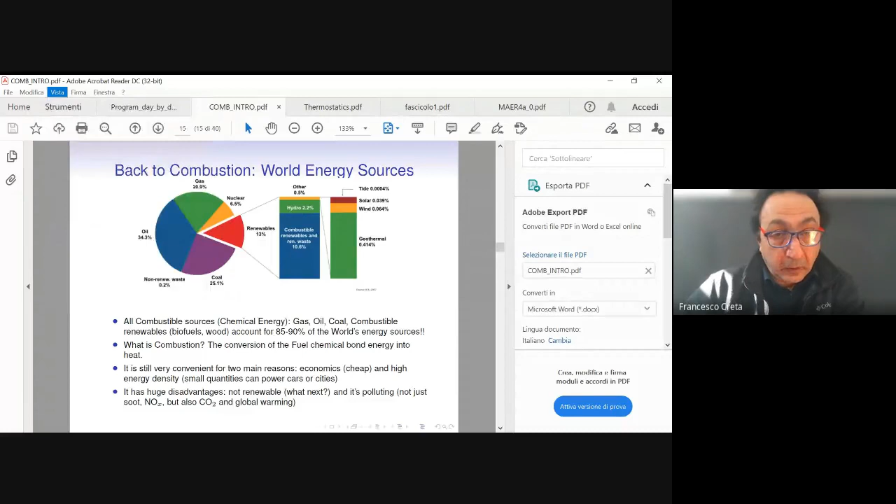There. Can you see? Sí. Okay. Yes, okay.

Perfect. Okay. This again, it's not fully part of the course, so it's just an introduction. Okay, so you don't have to take notes or anything. I'm going to give you these slides anyway. And then when we're through with these slides, I have some introductory slides for the thermodynamics part. Again, the first part is still an introduction. So it's about 3 or 4 full classes of introduction, let's say, which you have to follow, of course, but it's not part of the examination or anything.

Anyway, we were looking at this slide the other day, which really gives you an idea of how crucially important combustion is. If you look at the numbers, combustible sources account for at least 85% of the world's energy sources. The rest can be thought of as nuclear or renewables, but in these renewables, you also have combustible sources, such as biomasses and things like that. And it's clearly still widely used essentially for its cost. It is very cheap to burn things as opposed to do any other thing, okay?

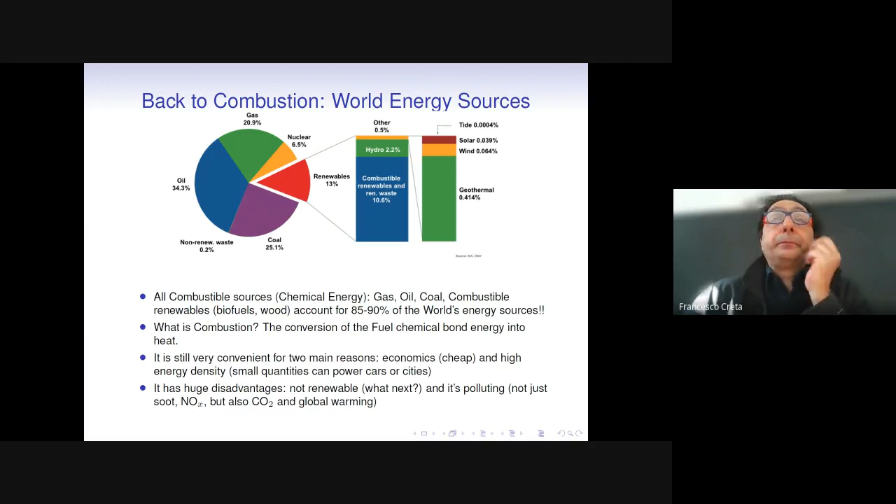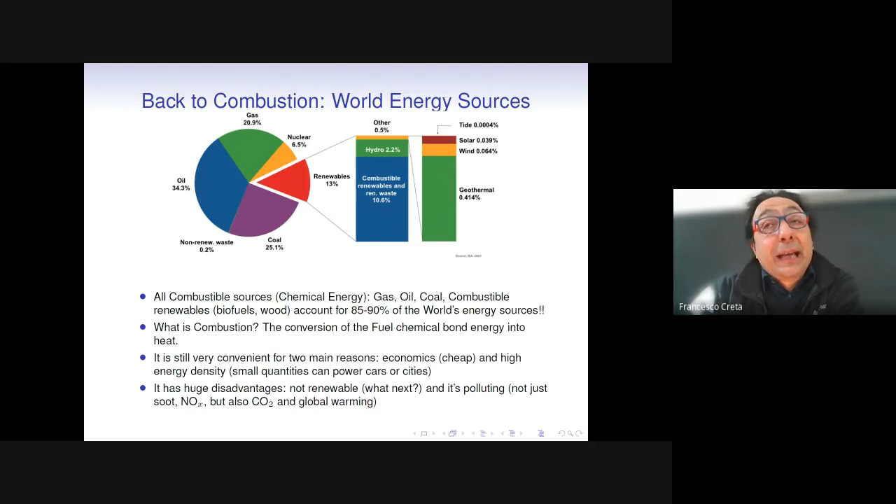Okay, this is one thing. The other thing: hydrogen has its own problems in terms of production. You can produce it through the electrolysis of water. You can carry it through other molecules like ammonia. Ammonia, NH3, has 3 hydrogen atoms attached to nitrogen. It's an ideal hydrogen carrier. It's also a fuel to some extent, though it's a pretty bad fuel. But if you don't use hydrogen, then you really have to know combustion physics in order to understand and mitigate the production of pollutants.

Well, this is another slide here about tomorrow's challenges. You're all familiar with this clearly, and you can see how exponential the growth of the energy demand is, really huge. So how do you reduce pollution? How do you reduce the emission of greenhouse gases? Well, you first and foremost need to study combustion.

And so combustion for you engineers is not just the conversion of energy within a thermodynamic cycle. That's what you're used to. For example, an aeronautical engine runs on a Brayton-Joule cycle. So your only question is not that of converting chemical energy into heat in order to have useful work extracted by the thermodynamic cycle, but it's also the problem of reducing and mitigating pollution.

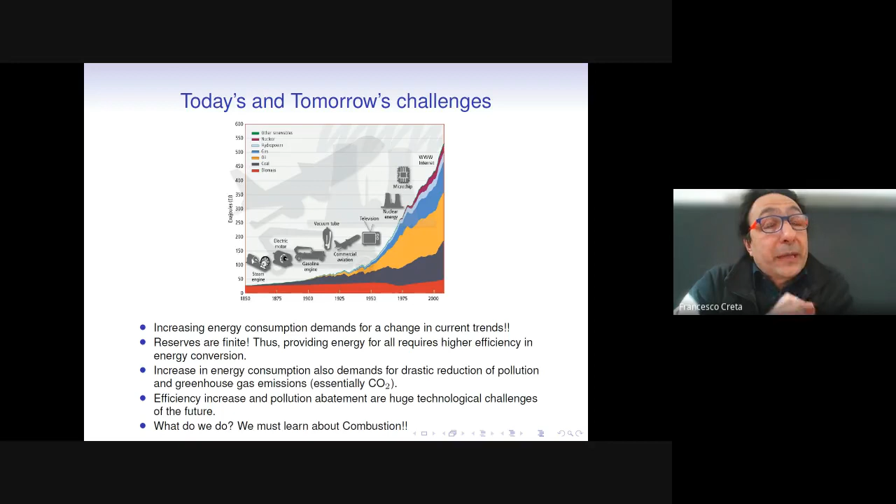clearly we're tending to maximize there the temperature, and by temperature we mean a very specific thing, which is called the adiabatic flame temperature, which is essentially the maximum possible temperature achievable in an isolated system. So a system that fully converts its chemical energy into heat without exchange of heat with the surroundings, in the stoichiometric proportions of oxidizer and fuel. Reason being, as you all know by now, the maximization of temperature will maximize the specific impulse of your propulsion system, okay?

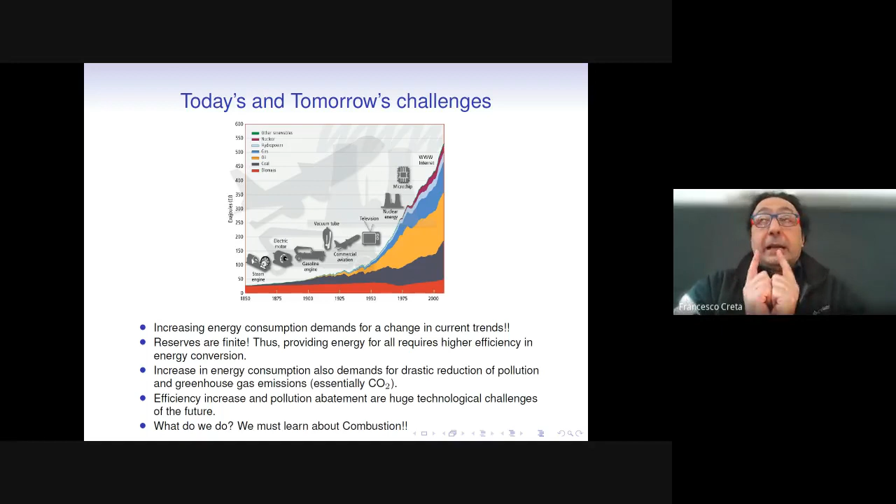And a great deal of this course will be dedicated to the calculation of both the equilibrium temperature and composition. So the adiabatic flame temperature and the equilibrium composition. So that is a very big, very important part of the course. And I'll tell you later. I don't want to tell you too much.

So what is pollution? Of course, it's an old problem, yes. We need to have new solutions, and we have, to some extent, a lot of new solutions. But let me just make a list of the main pollutants that we address as pollutants, okay? So we're talking about products of combustion. As we know, there is a reaction between a fuel and an oxidizer, and the products of this combustion will be molecules that are at a lower energy state than the fuel and oxidizer, so that essentially we can get heat out of the whole process.

This we've seen, but also you can't really choose your own product, okay? It's what you get. So one of the products, for example, is what we address as soot. Soot is this thing here, the black smoke coming out of the diesel engine. And it's really macroscopic particulates. So when you come across things like PM, particulate matter, PM10 or PM2.5, this addresses solid particles that are macroscopic aggregates of products of combustion, of the order of 1 micron or 10 microns in diameter.

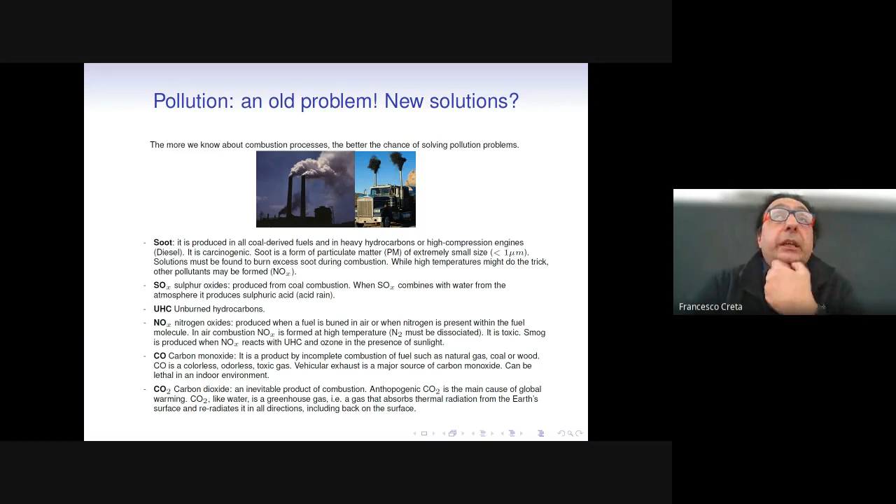Now, another pollutant is carbon monoxide. Carbon monoxide is quite poisonous. It's actually lethal. It is essentially colorless, odorless. You don't see it, you don't smell it, but you die from it. Now, CO is really intrinsic in the combustion of hydrocarbons because carbon monoxide is the very last molecule before carbon is fully oxidized to CO2. It's just missing one oxygen atom. So CO2 is not toxic, but CO is dramatically toxic.

Think about this. When we're burning things, if for some reason we're not completing the full oxidation of carbon into carbon dioxide, we're really producing a toxic gas. And this is what happens when you hear in the news of people dying from malfunctioning heating devices, especially during the night when you're asleep. You don't realize that your heating device is malfunctioning, burning inefficiently and not completely oxidizing the fuel into CO2. That's when the device starts to produce carbon monoxide.

So again, very, very toxic, especially in household environments. And then clearly CO2. CO2 is not considered per se a pollutant. It's a greenhouse gas, but again, it has to be considered as a crucial aspect of combustion, okay? In the sense of what I call here anthropogenic CO2, meaning man-made CO2, because that, as we saw the other day, completely displaces the carbon cycle and essentially extracts carbon atoms from reservoirs back into the atmosphere, where it shouldn't be there. And it cannot be processed naturally and put back into Earth.

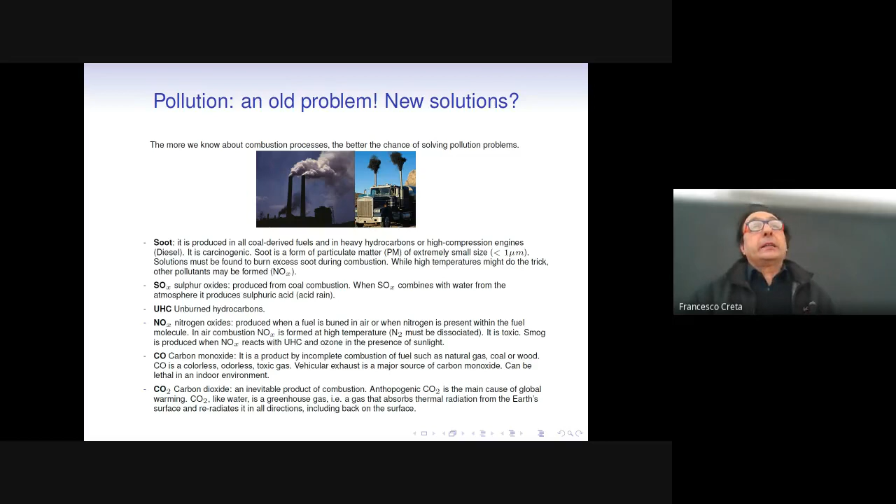Some people calculated how many trees we would need to process the CO2, okay, and fix it in an organic solid matrix like wood. And it's a ridiculous number, okay? Hundreds of trillions of trees, something like this. So it is not a viable technique, that of planting trees. It would be essentially a solution, but not one that is practical, really. So what we really need to do is reduce the input of carbon atoms in the atmosphere.

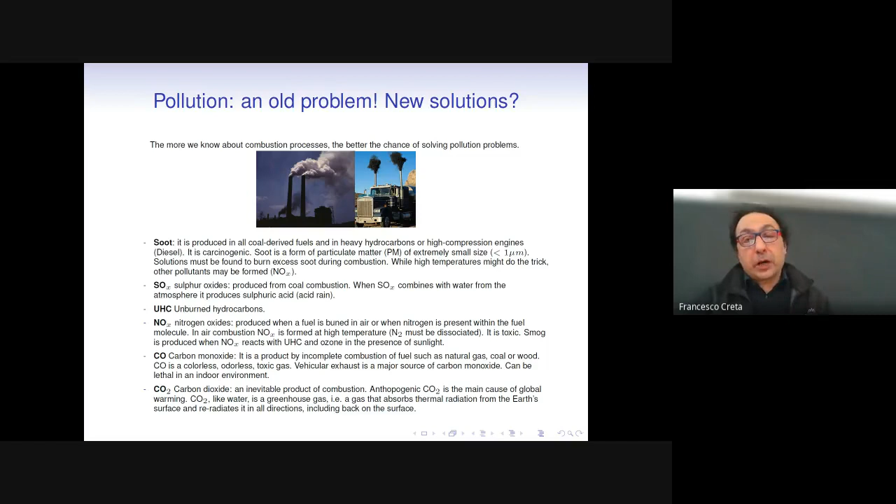Now, let's start playing some videos. You have to tell me whether you see them or not, because probably you can't if I don't share. Can you see this, or do you still see the slide?

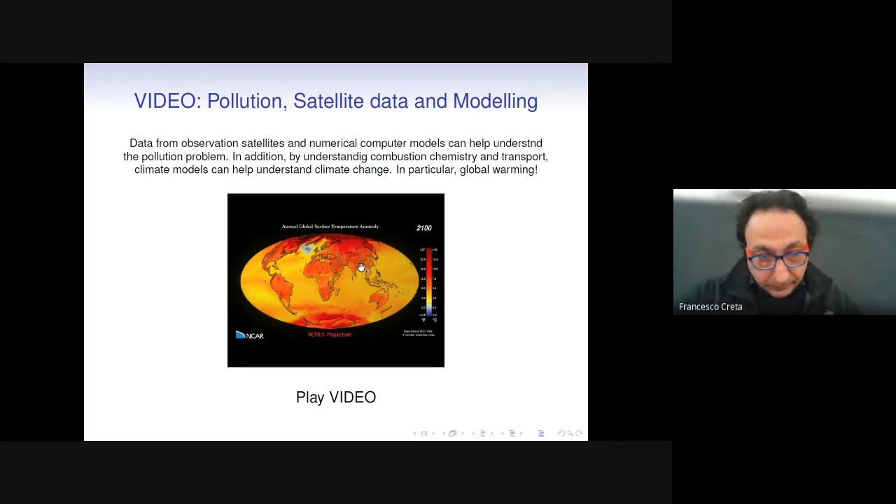I have to share the whole screen. Okay.

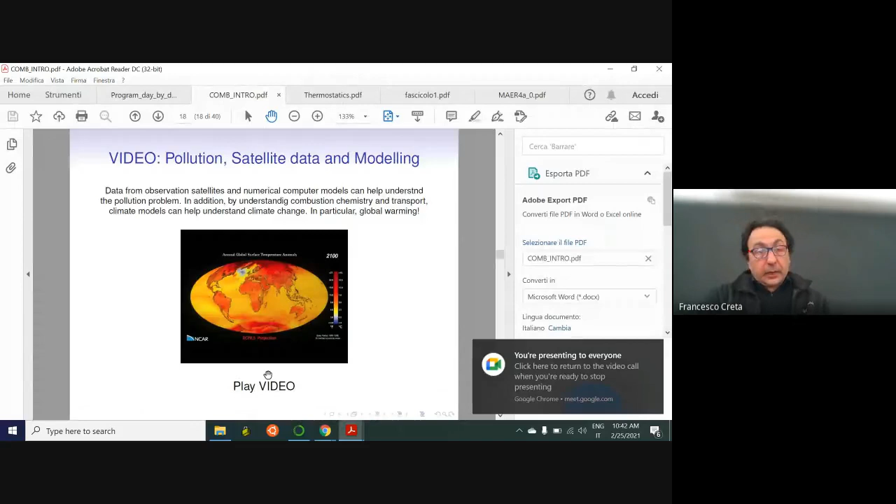Okay, well, what I'm going to show you here is essentially computer models that try to model climate, okay? In order to understand the impact of pollution. So what you can do is have a sophisticated model of the Earth's atmosphere where you're modeling, among other things, the radiation from the sun and the effect of a certain concentration of greenhouse gases within the atmosphere. What happens is that through the greenhouse effect, the radiation is being absorbed and then re-emitted at a certain frequency, okay, by the CO2 molecule. Therefore, the end effect is that of trapping heat.

Now, there are many models of this kind, maybe 20 around. They're very, very complex computer models that have been developed over a number of years, okay? But the tragic aspect of this is that they all agree. They all agree on the fact that the average temperature is increasing due to the excess CO2 in the atmosphere. So let's see.

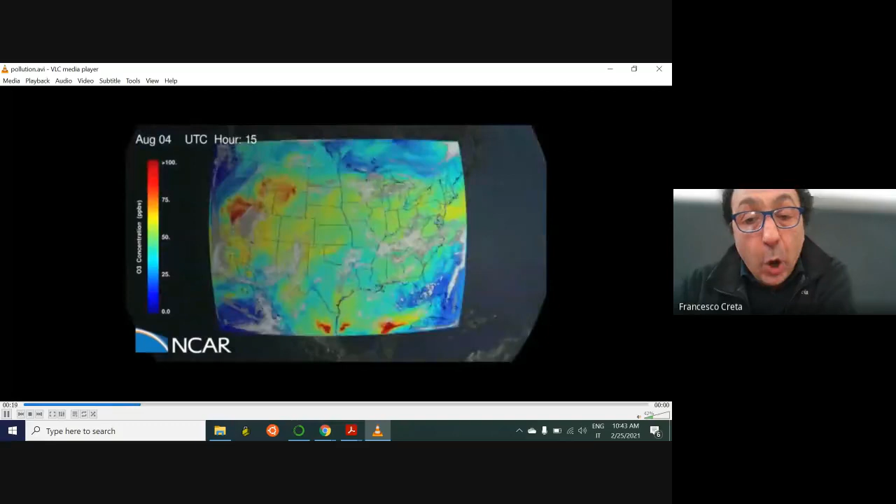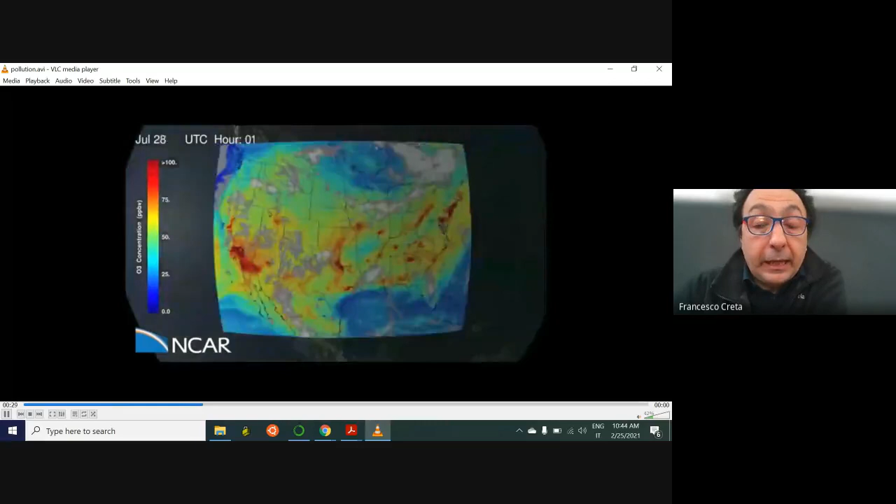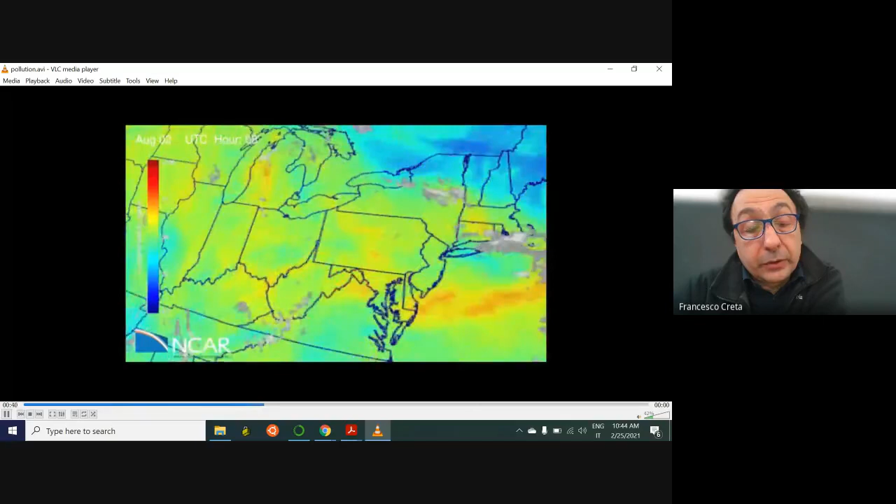So this is the National Center for Atmospheric Research. This is a blend of both computer models and data from satellites. This is a visualization of actual pollution. So this is reality. And it's the ozone that is being produced at sea level by things like cars and urban centers and factories. So you can actually see, going from day to night, okay, the pulsating input of ozone molecules that are quite visible in the United States. And you can see the dramatic concentration, especially in the populated areas.

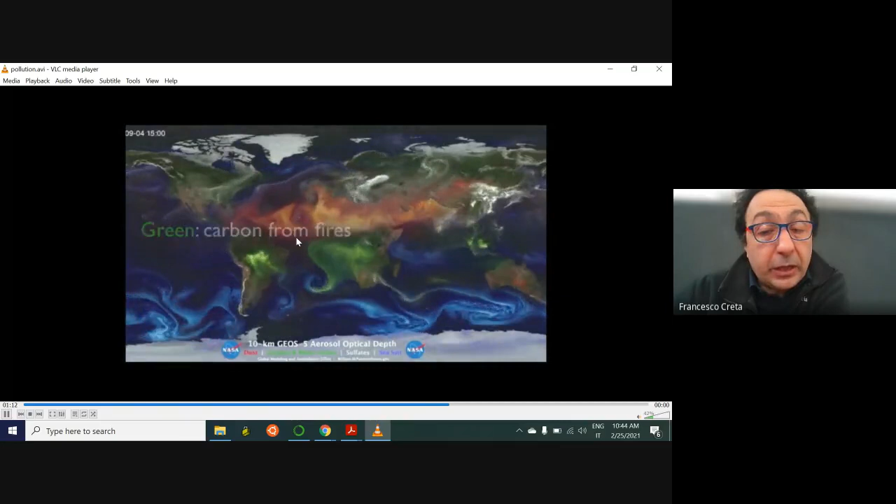This is another computer model of the Earth's atmosphere. And essentially, what you have to look for here is the white stuff. The green is carbon from fires, okay? The white is sulfates from fossil fuels and volcanoes. So essentially, you see that burning things has an effect on a global level. In China here, in Europe a lot, and in the US, you can see the input of sulfates that is man-made.

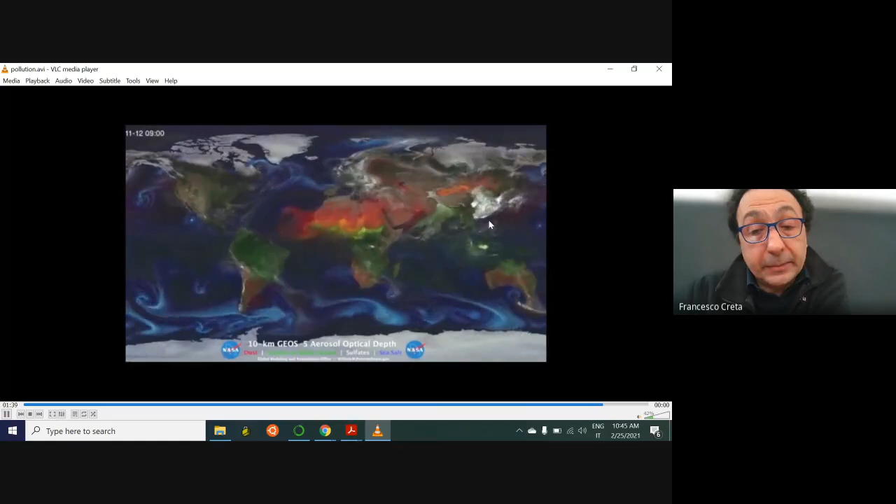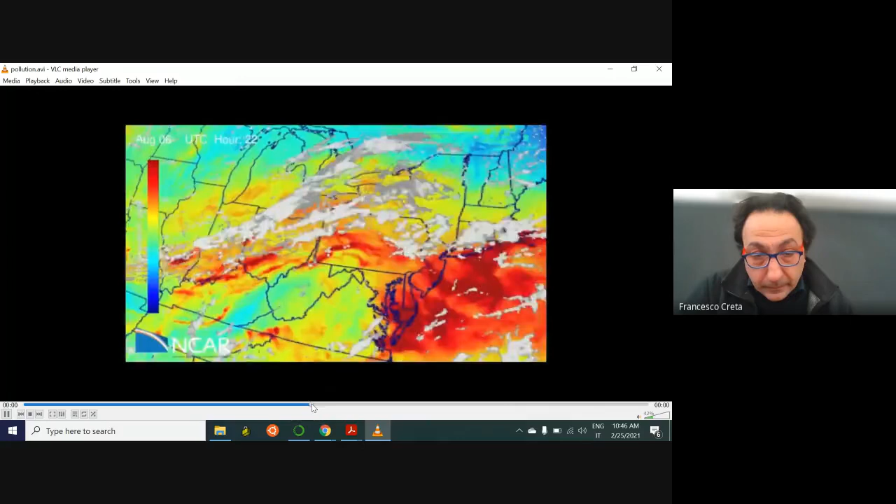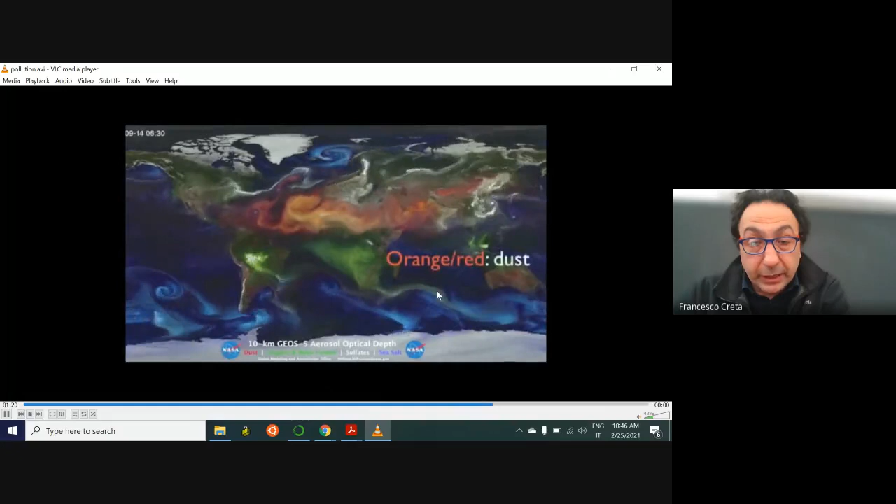You should concentrate also on Madagascar here, because there is going to be a volcano eruption. Well, not anymore. I don't know what's going on here. There's going to be a volcano eruption, and you can see, let's say, the natural input of sulfates, which is, I don't know, maybe I missed it. Sorry, blue is the sea salt. Well, anyway, if it's not here, then I may have dreamed it, but I remember that there was an eruption, and the input of sulfates was of the same order of magnitude.

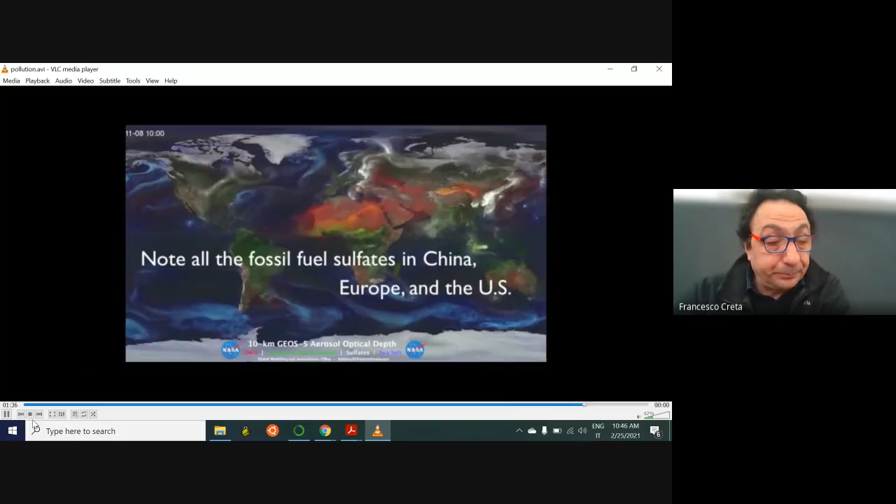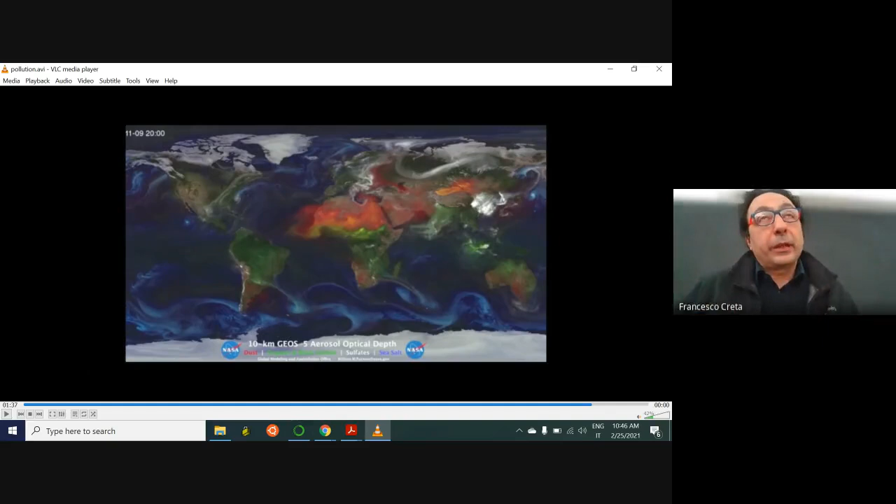Well, there's some skipping thing. Anyway, it doesn't matter. I'll show you maybe another time. But of the same order of magnitude as the daily input. So it's like having a number of volcanoes, okay, continuously erupting. That's the amount of pollution that we're actually putting into the atmosphere.

Now, we'll try to jump from one topic to another here, just to give you an outline of what combustion research is. It's a huge field, okay? So I'm going to give you just a few snapshots, okay, of what's going on. This is one thing that has been going on for the past maybe 30 years or so, which is trying to come up with more efficient ideas in internal combustion engines, okay?

I know that lately there's a lot of talk about electrical engines, or electrical power engines, but don't forget that electricity stored in batteries ultimately comes from power plants, which are very likely to run on hydrocarbon fuels. So at the end of the day, when you take two cars, one running with an internal combustion engine and another one running on batteries, at the end of the life cycle of the car, the pollution produced by both cars is comparable.

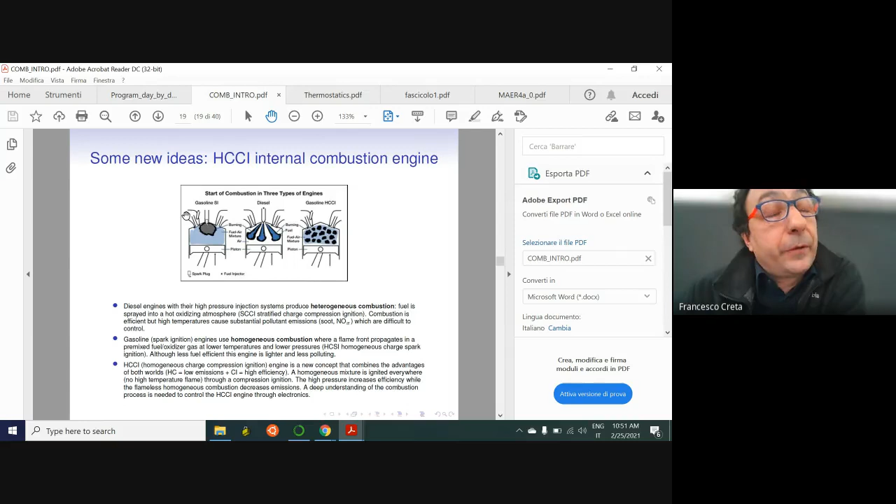It works through so-called premixed combustion or premixed flames. So in fact, what happens is that before entering the cylinder, the fuel is already mixed with the oxidizer. That's why it's called premixed combustion. So what you have here is a nice homogeneous mixture that is flammable. And the way in which these mixtures burn is through the propagation of a flame.

Now, you can choose your so-called equivalence ratio, so the mutual amount of fuel and oxidizer. It can be stoichiometric, it can be lean, or it can be rich, so in excess of oxygen or excess of fuel. So for example, in this case, you can totally avoid the production of soot because soot only forms in very rich environments. In diesel, because it's diffusive combustion and you're injecting the fuel directly, you have zones where the composition is rich.

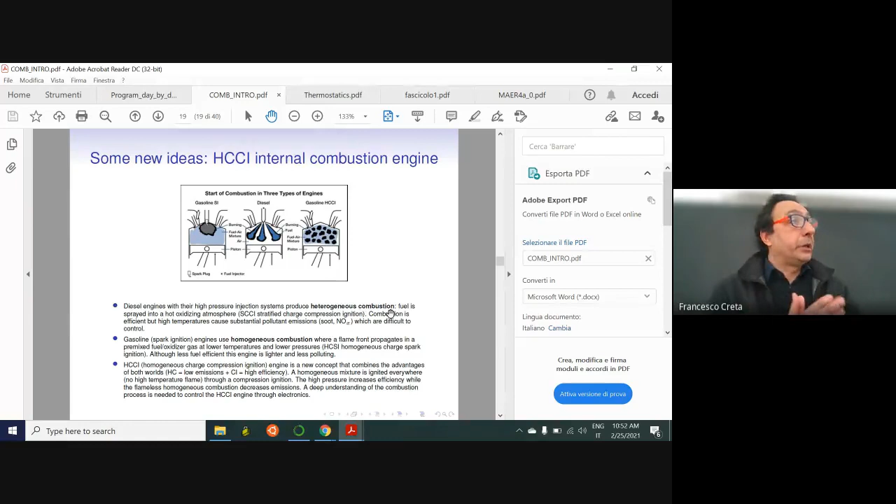Now, we know that these two have advantages and disadvantages. So diesel engines operate at very high pressure, and they have injection systems, and they work on non-premixed combustion, or as it's called, heterogeneous, as opposed to homogeneous combustion. Heterogeneous because you have essentially liquid droplets of fuel, and then you have a gaseous oxidizing environment. So fuel is sprayed into the environment.

So we call this an SCCI engine, a stratified charge compression ignition. What does that mean? It means, first of all, the charge of fuel is stratified. Essentially you have different compositions because you have a jet. You don't have a homogeneous fixed composition. You have a stratified charge. It changes from point to point, unfortunately.

But you have compression ignition, which, because of the high pressure, is thermodynamically quite efficient. So combustion is efficient, and the thermodynamic cycle is efficient. That's why diesel engines were popular. But the stratified charge is a source of pollution. So it has good and bad in itself.

Now, gasoline engines or spark ignition (SI) engines use premixed combustion, which we can call homogeneous combustion. So it's just one phase, a homogeneous gaseous mixture of fuel and oxidizer.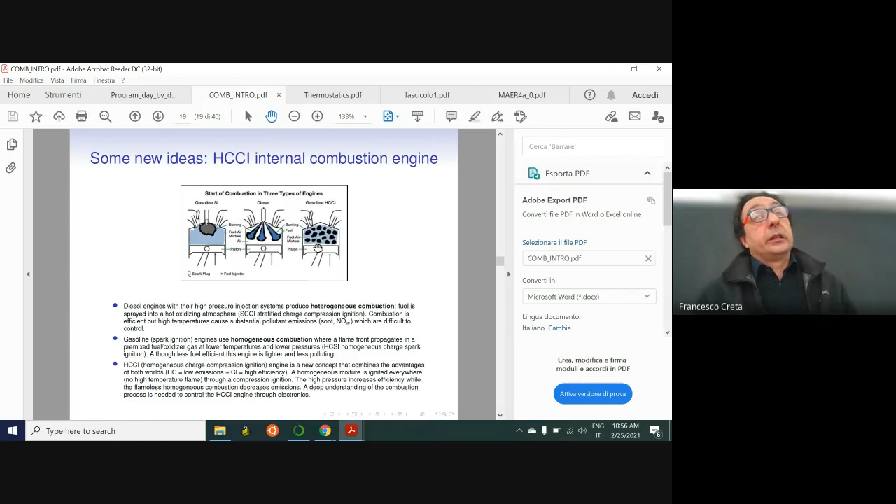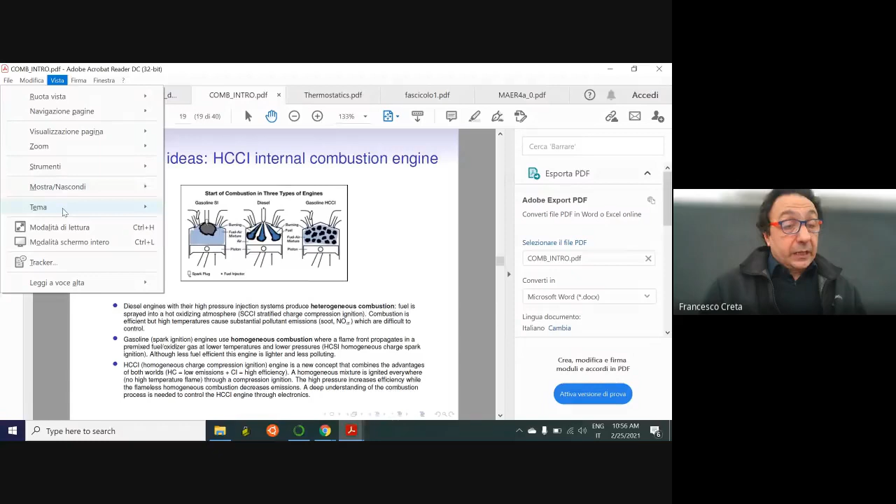Homogeneous ignitions. So the high pressure now increases the efficiency of the cycle, and this so-called flameless combustion, homogeneous combustion, decreases the emission. So it would be a nice idea, but the thing is, it is extremely difficult to reach and support in a stable manner this sort of regime of combustion. Okay, so to this day, no HCCI engine has ever been industrially produced, unfortunately. But again, that's why we need to study combustion. Okay.

This is another application of combustion research, okay? And it's computer modeling of combustion. Now, this is something that myself, I am involved in for many years. Now, in order to design combustion devices, computational fluid dynamics and computational models are used in an increasing manner, okay? Of course, to carry out simulations, you really need to master the theory of combustion. Why? Well, because essentially this reason.

Combustion, whether it's non-premixed or premixed, invariably occurs in a turbulent environment. You can see here, okay, especially with Reynolds numbers associated to both internal combustion engines, or this is a helicopter combustor, an aeronautical combustor. The physical dimensions are such that the Reynolds numbers are extremely large. When the Reynolds numbers are large, the viscous forces are extremely low with respect to the inertial forces, and you have a turbulent regime where a series of cascading smaller and smaller size eddies are formed, and these will interact with flames. Okay, so that's the whole complexity of the process.

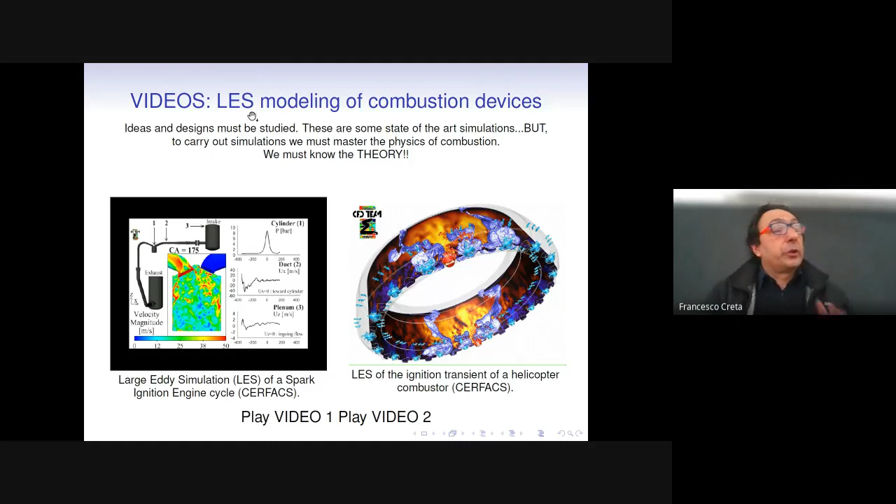So we need larger grid sizes, much larger than your characteristic length scales, much larger, unfortunately, than the thickness of the flame. And then we use models that are physics-based, that is, they take advantage of our knowledge of combustion physics to model whatever we are not seeing on the grid, okay? And this is called, for example, large eddy simulation, which is already complicated with non-reacting fluids, but now you have a reacting fluid, so it's much more complicated. Let me show you some examples here.

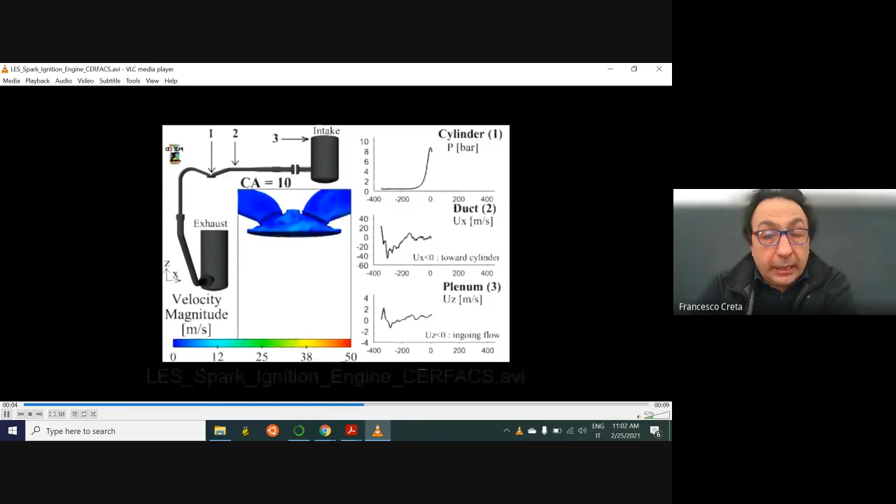So the first example is an internal combustion engine, okay? So again, you can't see the mesh here, but this is one example. The other example is the one on the right here. You'll see the ignition process of this combustion chamber.

So you see a number of injectors here. They're swirled injectors, okay? Very similar to also the ones you find in aircraft engines. And in fact, this could be, okay, it's very similar to an aircraft engine. So it's an annular, so you have the shaft in here, and then downstream here, you'll have the turbine, and you have the compressor ahead.

And you'll see that the yellow part is essentially the hot part. You'll see a flame propagating all the way around. Okay? I hope you can see. So you see here the injection, and then you'll see a premix flame forming, you see here, and then propagating all the way down the combustion chamber, you see?

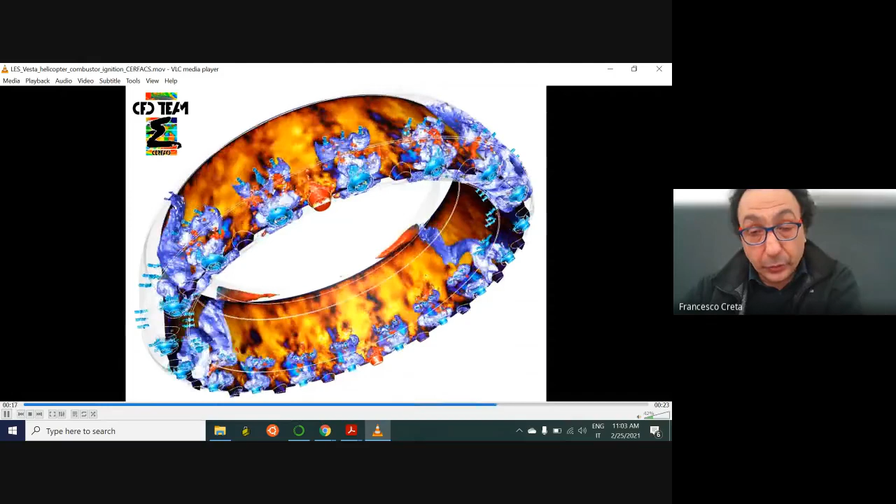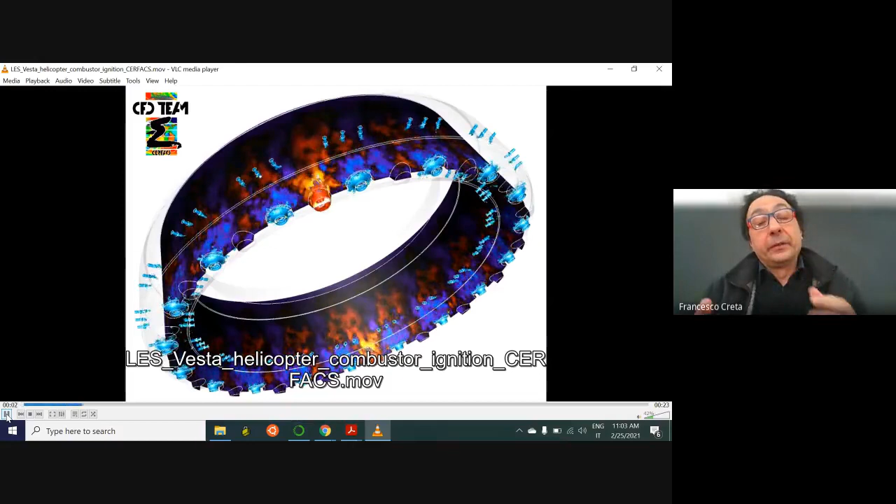Now, this is an LES. So again, there's a lot of modeling here, a lot of subgrid models, okay, that work in order to essentially tell us what is going on within a single cell, okay, which is far bigger than the Kolmogorov scale or the flame thickness.

In this particular case, for example, what they did is they thickened the flame artificially in order for you to resolve it. The problem is that you're changing the physics here, so you have to compensate for that, okay? So that's one technique that's being used.

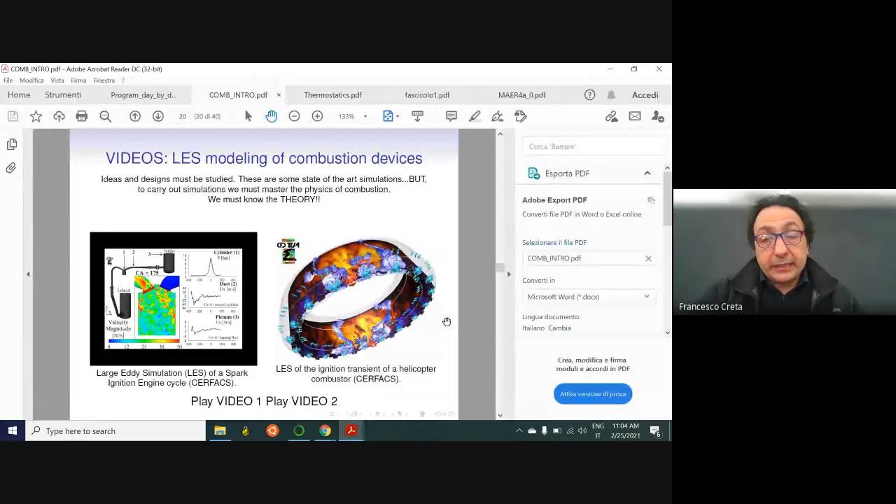Ramjets essentially are engines that don't have compressors and turbines, but they essentially work at high speed, and they compress the fluid just by the action of the ram effect. Okay, the ram effect is essentially a compression in the diffusion part or in the air intake. Clearly, it won't work when the aircraft is stationary, so it needs to be brought to a certain speed, supersonic speed.

But in a ramjet, the stream of air is compressed, but it's compressed and slowed to subsonic speeds through a series of shock waves, okay? So that you can burn your mixture, your fuel within this airstream that is subsonic, which is easier to do. Now, clearly at high flight speeds, the losses in terms of total pressure losses through the shock waves are huge.

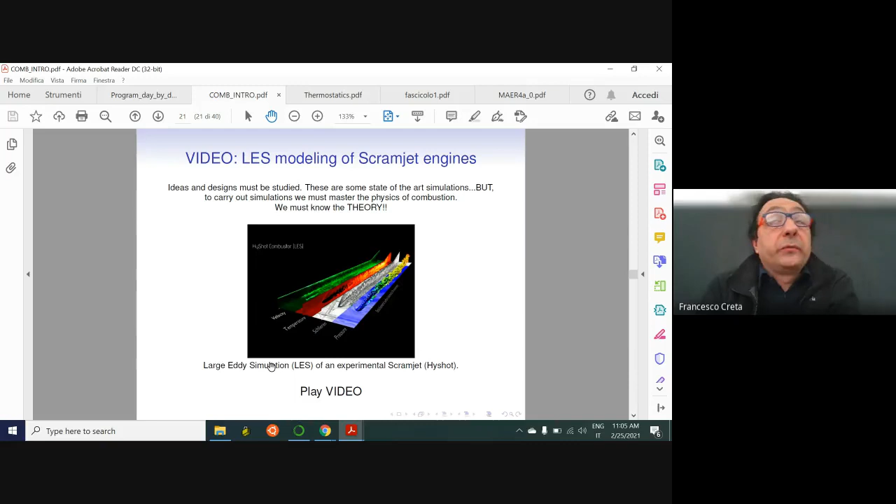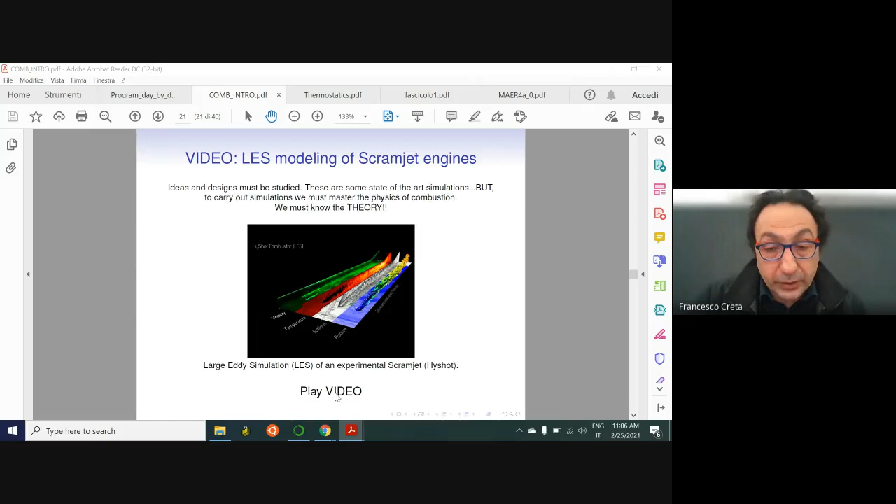So one way to avoid this and be able to access sort of much higher flight speeds is to carry out the combustion within the engine at supersonic speeds. So this is a supersonic combustion ramjet, or scramjet, okay? Now, this is a simulation of what's going on in an actual device that's called HyShot.

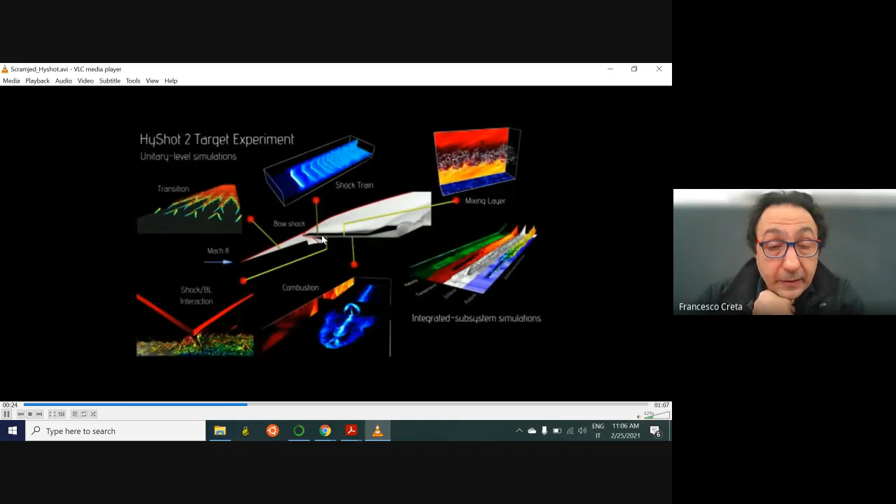It's just something that is sitting on top of a rocket that was experimented a few years ago, where essentially you'll fly this thing for a few seconds, and within this shell here, which will fly off, you have an air intake, okay? And within this part here, you see the shock here, the shock wave. Within this part here, you'll have combustion, okay?

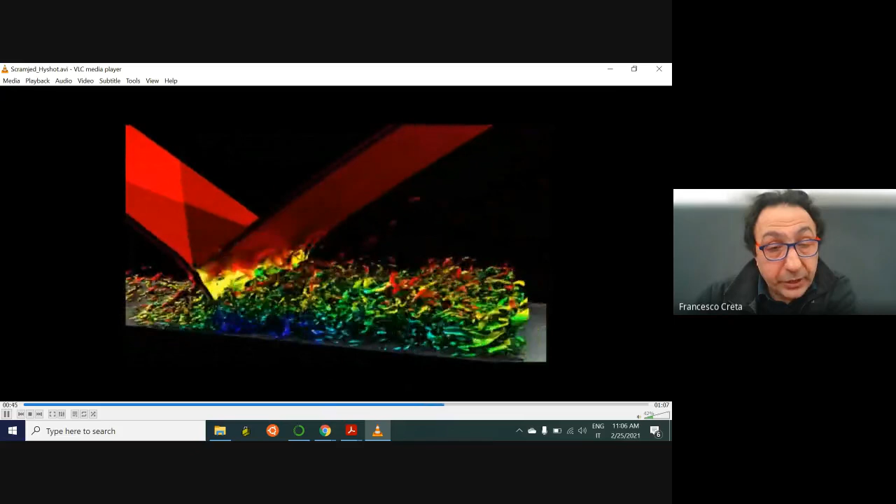So this is a simulation of a shock wave boundary layer interaction. So you have a turbulent boundary layer here and a shock wave that is stabilized. You see the sort of lambda shape reflection here, and you see how complex this situation is. We're still talking about large eddy simulations.

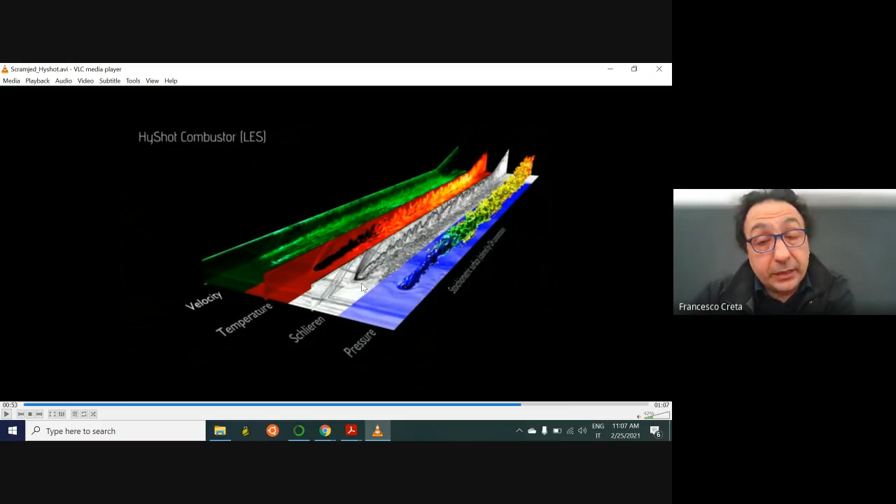What you see now here is the injection of fuel in this supersonic stream. So you see a sort of a side or a jet in crossflow, as it's called, being injected within the stream in the hope that clearly you can stabilize a flame of some sort and convert chemical energy into heat.

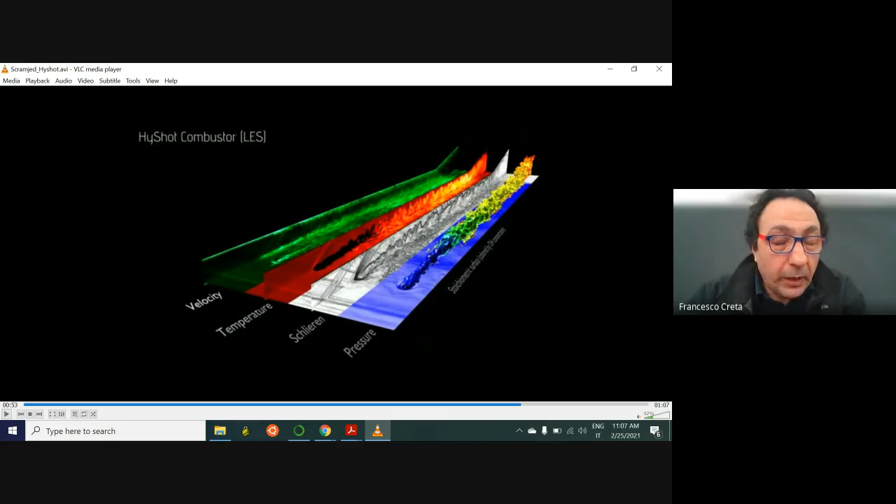Now, you see pressure here, the pressure field. You see the Schlieren field, which is essentially a measure of the gradient of the density, the temperature field, and the velocity field. Okay. Again, very, very complex simulation. It's also quite old at this point, the simulation, but you can only imagine how complex this is.

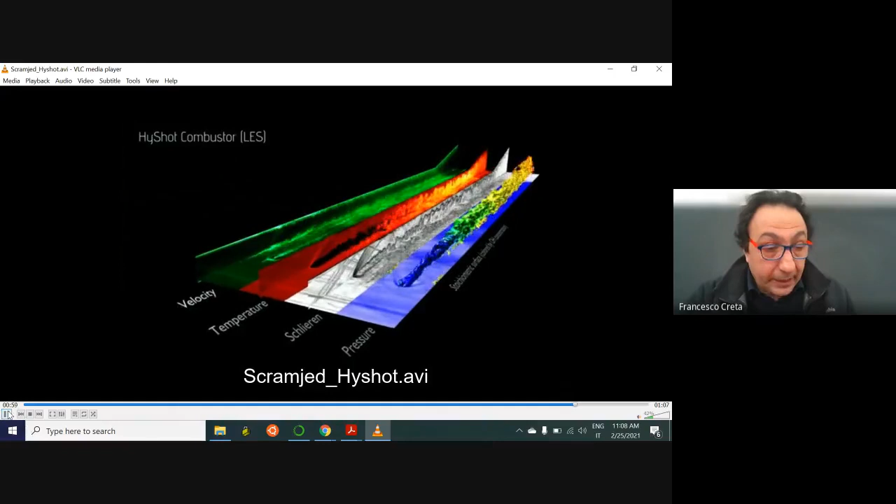And you can see, for example, the shock waves emanating from the, let me show you again, emanating from the jet in crossflow, okay?

Now, I'll be honest with you, some of you will be involved in some sort of numerical simulation at some point in your life. Before we can get to this, we need to know what we're talking about. We need to know the physics of combustion. So unfortunately, there's a few steps that we have to take back before we can do this, okay? This is the fun stuff, but we have to do some sort of boring stuff before this.

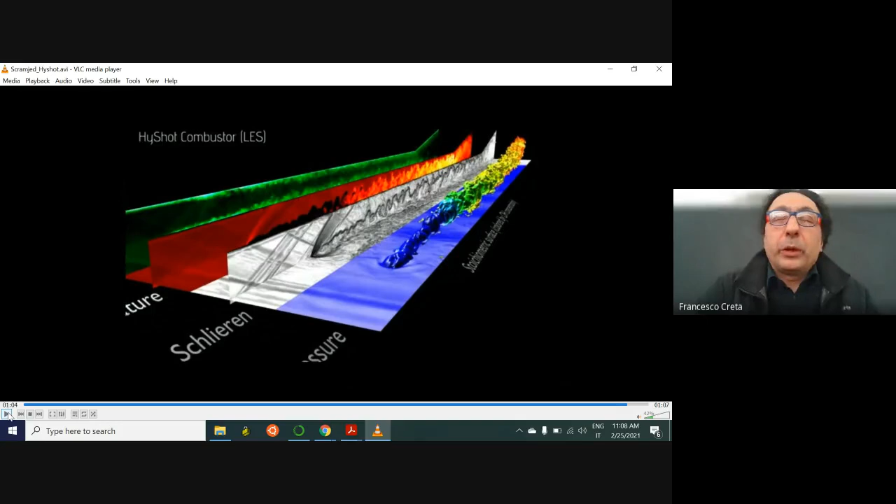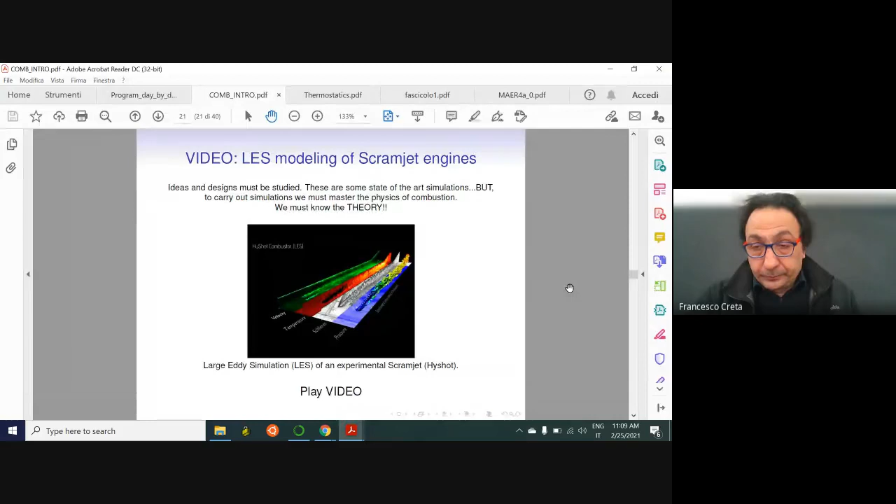We have to know how to calculate a numerical thermodynamic equilibrium. We have to know about chemical kinetics. And clearly, we have to know a little bit about reacting flow fields. Reacting flow in general, which can be laminar. In this case, it's turbulent, but before introducing turbulence, you really need to know what the solutions are without turbulence. Okay? So this is one thing.

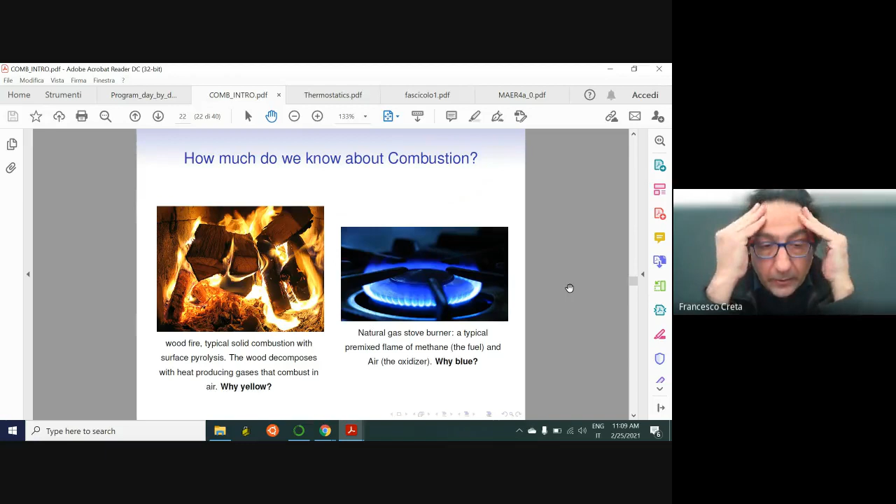Yeah, but let's proceed a little bit more in detail, and let's talk about the kinds of combustion. Okay, so if you talk about combustion in general, the first thing that may come to your mind is a bunch of wood burning like this. It's your typical solid combustion. And this is your typical gaseous combustion. These are both things that we have contact with almost every day, right? This is combustion in a gaseous form, okay?

Now, a combustion scientist will tell you that the wood combustion, which has this yellow color, we'll see why in a second, is your typical non-premixed combustion, okay? What happens here? It's pretty complicated, actually. When you put a piece of wood in a very hot environment, that's why the process is very slow to start, you need a localized source of heat. You have a chemical decomposition on the surface, called pyrolysis, which decomposes the solid, a very long chain hydrocarbon, into combustible gases or fuels. One of those is undoubtedly methane, okay? So we've been talking about methane all the time here.

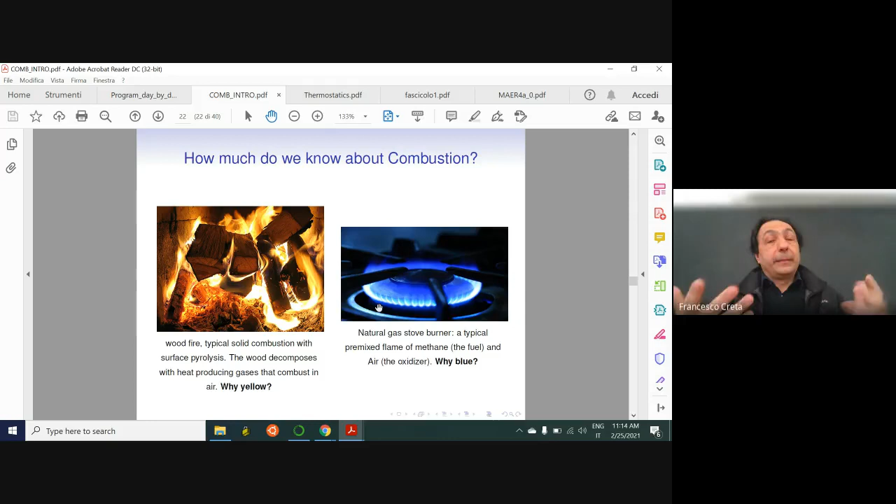What's going to happen is there is going to be a spherical flame. It's clearly isotropic. There is no preferential direction, so it has to be a sphere, moving outwards at about 40, 50 centimeters per second. So it will take quite a while for the whole thing to burn, but it's going to be pretty fast. Now, clearly, in a burner like this, it's completely controlled.

So you have a stable flame anchored at the side, it's a sort of a Bunsen burner kind of flame. So we'll see how it's stabilized later on. You see this color blue. Completely different. And we'll see why, but there is no yellow. The yellow is a typical color of the carbon atom.

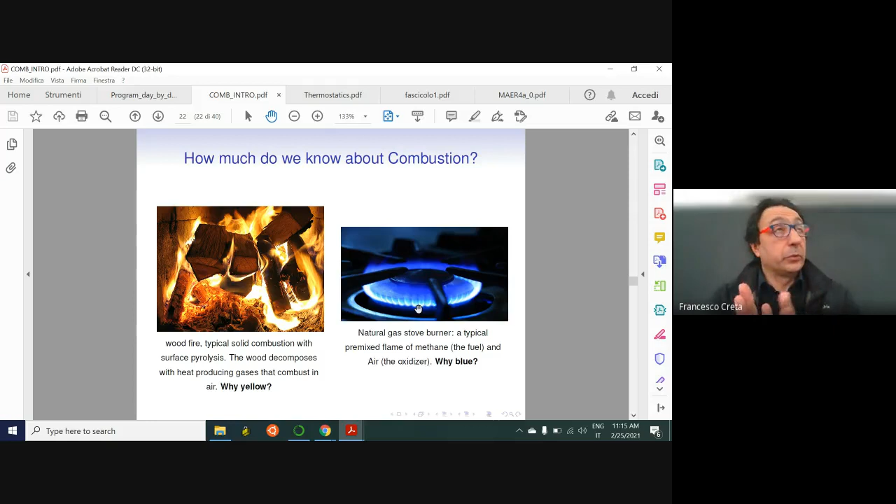So in this particular case, it's also the fact that soot is being heated up to this sort of bright orange color. This is the optical band where the emission of carbon occurs. In this case, there is no carbon emission directly. There are some intermediate species called radicals that will emit on the blue frequency. And these are the CH radicals. We'll see in a while.

CH is an intermediate species. It's a species that occurs inside a flame, and essentially in the motion of the flame going into the fuel, it will be encountered right in the middle of the flame. Later on, this is going to be oxidized into CO2. But within the flame, it's visible and it will emit in blue color. So that's why in premixed combustion, you have this blue color.

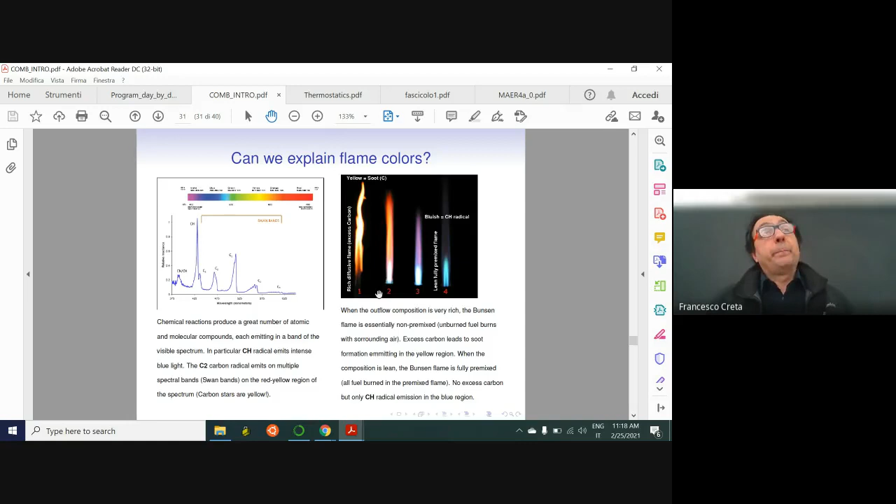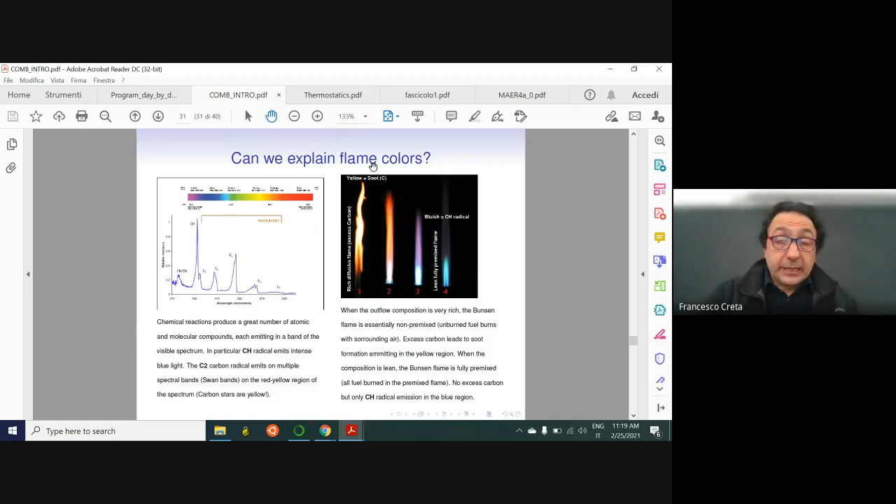If you let air in, it will mix with the fuel to produce essentially a premixed flame, obviously. On the other hand, if you close it, you will only have fuel, so a very rich mixture of fuel, that will eventually burn with the air outside. So when you have it closed, this is what happens. I hope you can see it.

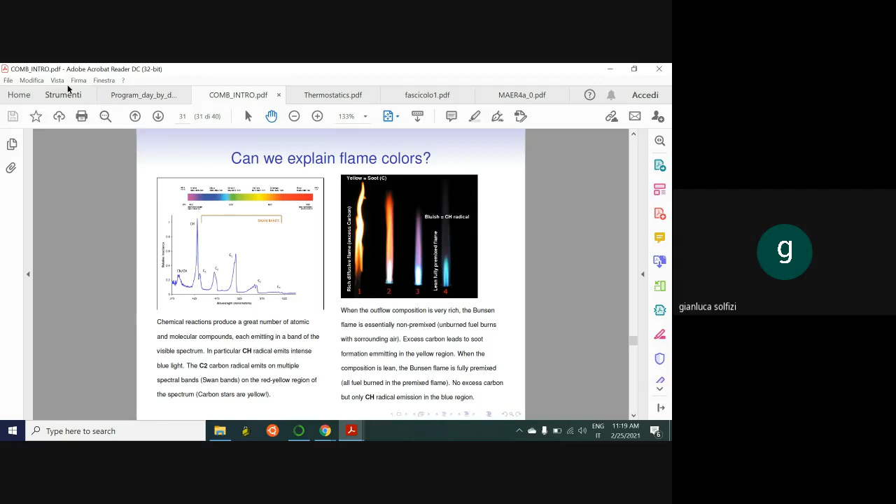I'm sorry, Prof. Could you make the slide bigger? Because I can't see the graph very well. Thank you very much. That's as big as it will go. Oh yeah, I can make it bigger.

So you see here the yellow flame. Now we know that this is burning diffusively. It means that outside of the outflow of the Bunsen burner, you essentially only have fuel. So this fuel, you see here, will mix with the outside air in this particular yellowish flame,

which is pretty non-efficient, as you can see, because it will have to wait for the mixing process, the diffusive process, to occur. And in the meantime, in the richer part of the flame, you will also have very dirty combustion with the production of soot, and soot will emit in this particular band or wavelength.

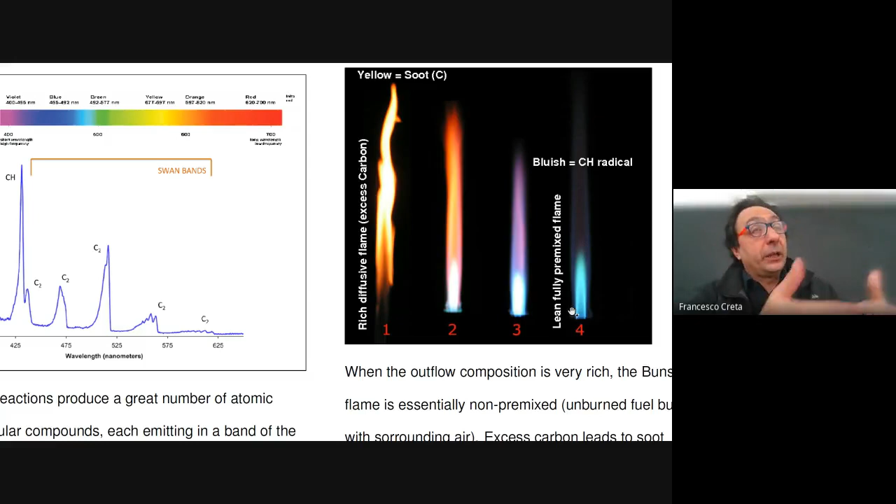Now, suppose you open the wheel now, you let air in, okay, you will have premixed combustion, which is what's going on here, okay? So in this particular case, you have a premixed flame, which is stabilized here with its own speed, wanting to essentially propagate inwards, but because the velocity of the flame and the velocity of the gas, of the combustible mixture, are of the same order of magnitude, you have essentially a stabilized flame over here. And it will emit in the blue color because of the CH radical, okay?

Now, of course, I did this stupid thing and okay, so that's the idea with colors, okay? Flame colors. Let me go back to this. We talked about diffusive flames and premixed flames. These are the two sort of main ways in which combustion is manifested when you have combustible mixture and you have fuel and oxidizer separated.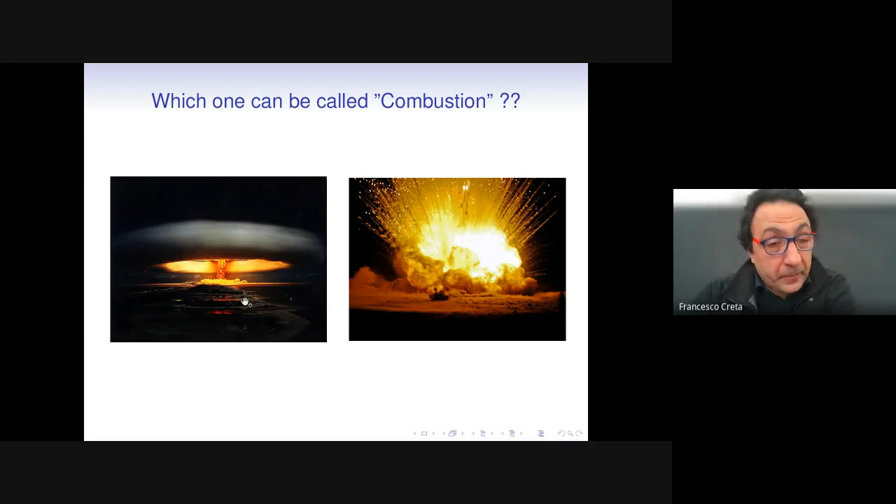Now, if you look at a picture like this, here on the left, you may also ask yourself, is this combustion or not? Well, for sure, this is not, right? So this is a thermonuclear explosion. We know that in thermonuclear explosions, we don't really have chemical reactions. We have nuclear reactions, right? With a variation, essentially, of atom species, so elemental composition. So we have atoms or nuclides being changed into something else. In this particular case, into something lighter.

In combustion, we know that there is a full conservation of atoms. What you do is you rearrange the atoms into different molecules, which are essentially more stable at a lower energy level so that you can get sort of an excess of heat, but you never have net production or destruction of atoms. You start from your supply of atoms and you have to end with the same number and the same kind of atoms.

So think of combustion or chemical reactions as playing with Lego, okay? You have your Lego pieces to start with. Whatever you do, you'll end up with the same exact Lego pieces, unless, of course, you lose them, okay? In nuclear reactions, you don't, okay? So this is not combustion. Now, where is the energy coming from here? Well, it's coming from the binding energy of the nucleon, okay? So the strong nuclear force binding together the nucleon.

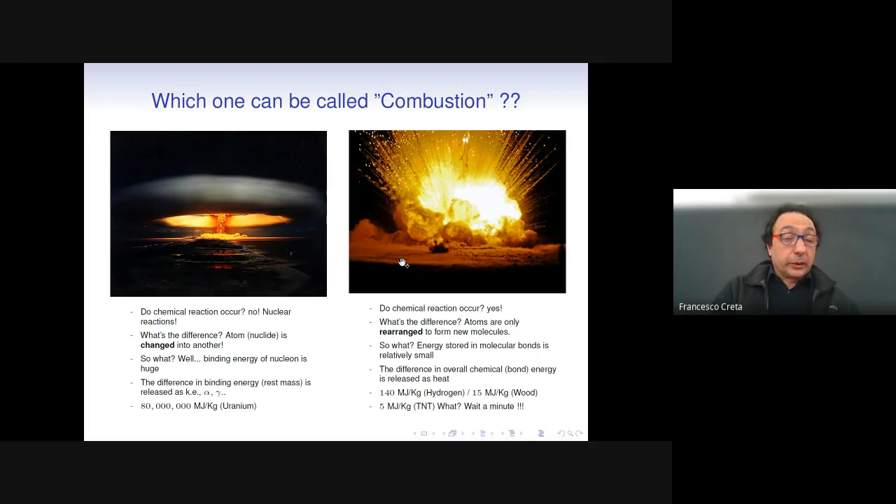In fact, if you look carefully here, you'll see a circular edge here, and this is a shock wave, which is formed because of the immediate expansion of the gases, and it's exactly what ends up killing you if you're close to the bomb, let's say. So that's not combustion here. This is. Again, this is what the difference is between a deflagration and a detonation.

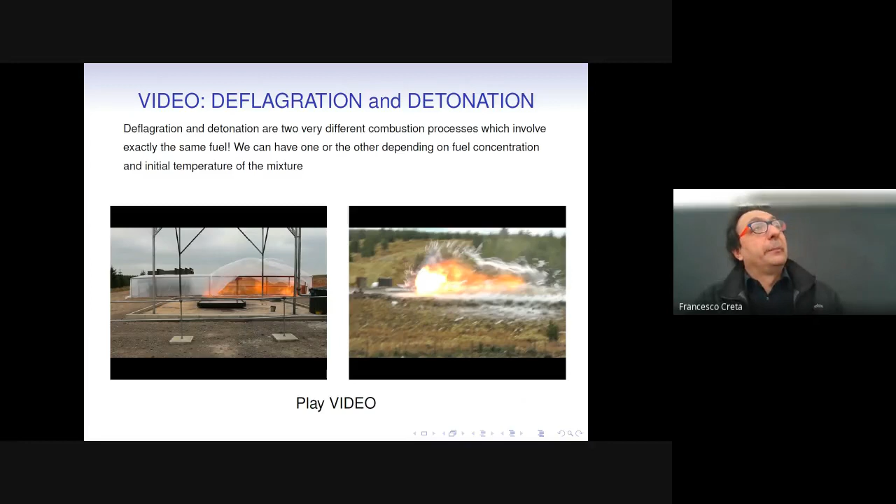Now, you'll see this because they can do both in this sort of plastic kind of enclosure here where they will pump in some combustible mixture and they will do both a deflagration and a detonation. So let me just play the video.

You can still see okay, right? Because I don't see you guys. I don't see anyone. So yes. Yes, okay. Professor.

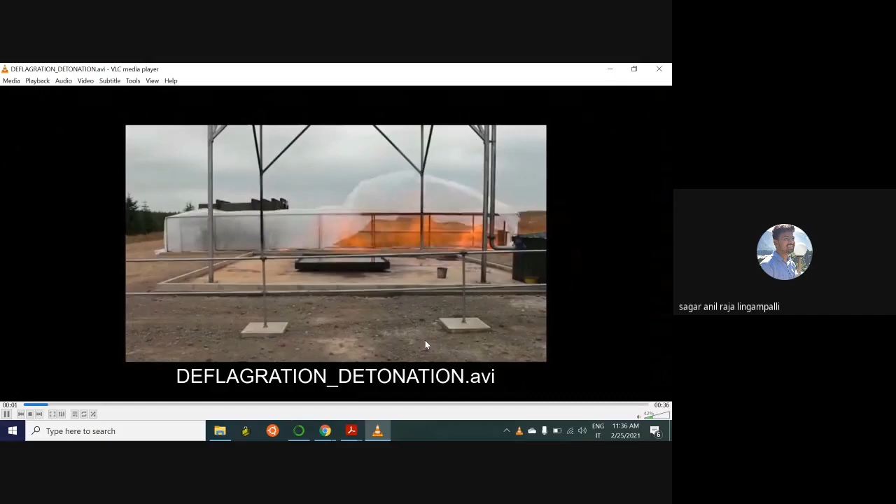So what you've just seen here is a deflagration. So I'll just play it again. So it's pretty dramatic, but you can see the flame propagating from right to left. If you are quite careful. So this is a few meters, okay, say probably 10 meters. So it will have a certain speed. Now, bear in mind, these are not laminar speeds. These are more turbulent speeds. So far higher than the standard 40 centimeters per second. So it's a few meters per second. But still, the whole thing will take about a second or so.

Now, this is it from a distance. You see that you can actually see the flame front propagating from left to right. So this is from a distance. Again, I'll show you again.

Can you also hear the noise? The audio or not? Probably not.

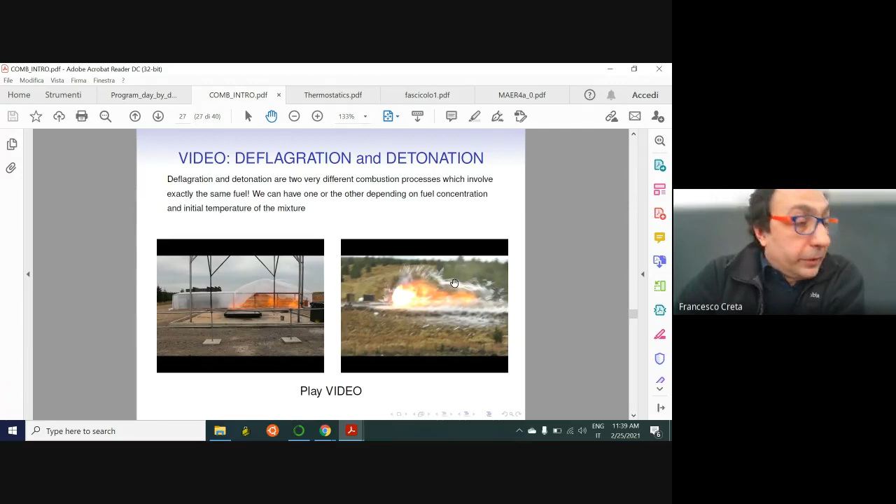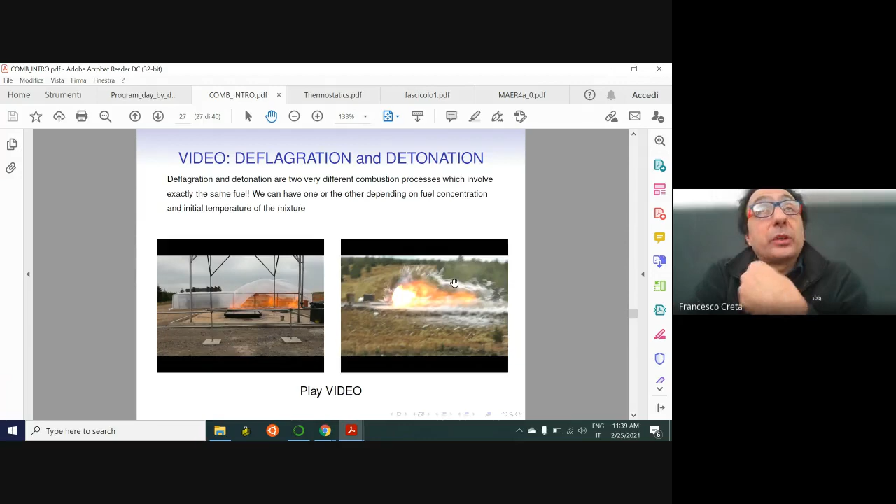Now, this is, for example, what happened in Fukushima. In Fukushima, the Japanese nuclear plant suffered, as you know, in 2011, a dramatic failure. And one of the things that happened was that there was a huge explosion of hydrogen gas, and it was actually a detonation. So if you go on YouTube, you can see the explosion in Fukushima, which happened to cause most of the problem. It was actually a detonation of hydrogen gas. So you can actually see that.

Now, this is the interesting part. So first of all, we know now in premixed combustion that there are these two different modes of propagation. Okay, a deflagration, a very slow kind of useful way of converting chemical energy into heat, and then this dramatic sort of detonation, which is much faster.

Now, the first one, the deflagration or premixed flame in general, these are synonyms, propagates slowly, essentially because it's driven by a very slow phenomenon. And this phenomenon is essentially the conduction of heat, or heat diffusion. So as you know, when you try to heat up, for example, a piece of metal in a fire, it doesn't heat instantaneously, right?

It will heat quite slowly, because it is involved. It involves the motion, the kinetic energy of molecules that start vibrating. In a gas, this is even less efficient. Okay, so the conduction of heat is the main driving phenomenon. Okay, so it's pretty slow, the whole thing.

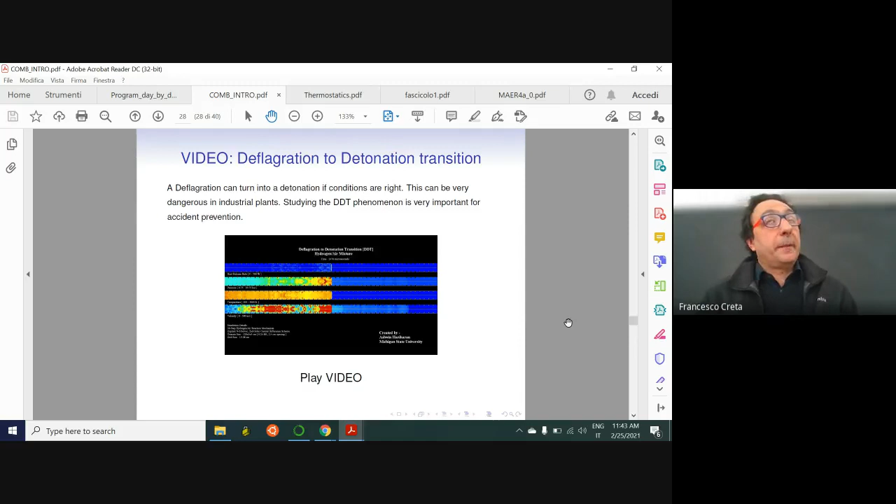Now, whether you have deflagration or detonation is really something that has to do with the conditions, okay? The conditions in which these things are operated, especially in gases. Now, in solids, you can have a detonating energetic material, okay? Like TNT. In gases, it's more probable that you have a transition. And I'll show you here in these last 2 minutes a so-called DDT, or deflagration to detonation transition.

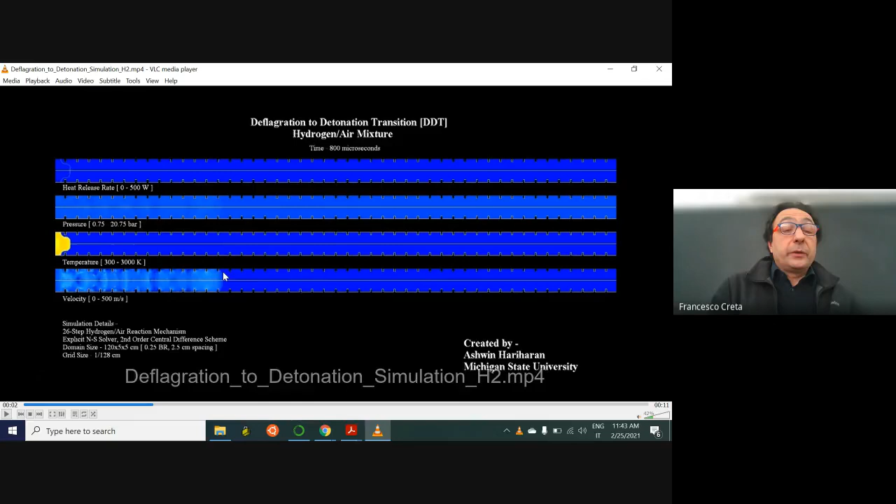So here you see a duct, okay? It's repeated 4 times because it's showing you 4 different things. You have velocity here, temperature, pressure, and heat release. Now, remember if you've done your gas dynamics exam, okay, or some knowledge of gas dynamics. Remember fluids, remember that disturbances of pressure and velocity will travel at the speed of sound.

So the first thing you see here, you see this very fast velocity perturbation, which is also reflected in a pressure perturbation, which moves very, very fast. Okay, so I'll just play it again. You can see how fast it is. On the other hand, look at this.

The temperature here, this indicates the flame. You can probably see a very, very thin layer here, and this is actually the thickness of the flame. So this is the very slow propagating deflagration. So this is a premixed flame. Now, this premixed flame is perturbed by these obstacles. See these obstacles? They've introduced these sort of ridges here in the duct, okay, that perturb the flame, which becomes more and more wrinkled, and eventually it will transition to a detonation.

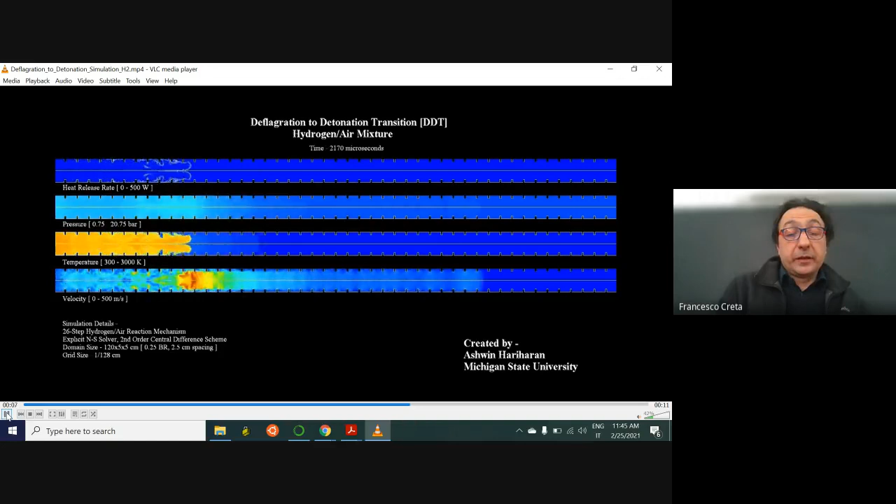There you go. So you see, you can play the thing back in the recording. There is no in-between kind of propagation speed. It's either propagating as a deflagration or as a detonation. You see? Deflagration, detonation. There is no in-between. So these are the 2 main mechanisms that the combustible mixture has to propagate.

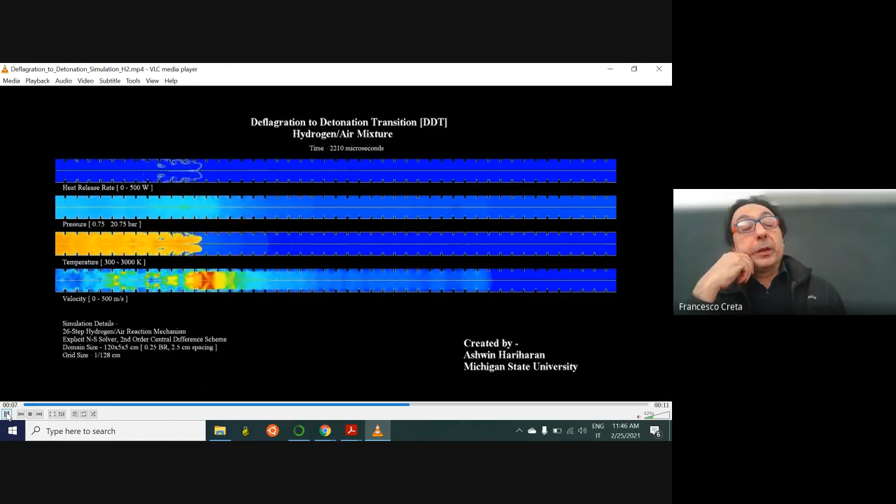Now, unfortunately, we don't have too much time here. In fact, it's over, but I'll play it back. But when we study these things and we apply the conservation of mass, momentum, and energy, we'll be able to see that the only solutions possible, okay, are these 2 solutions, the deflagrative solutions and the detonating solution, okay? There is no possible sort of in-between kind of scenario, okay?

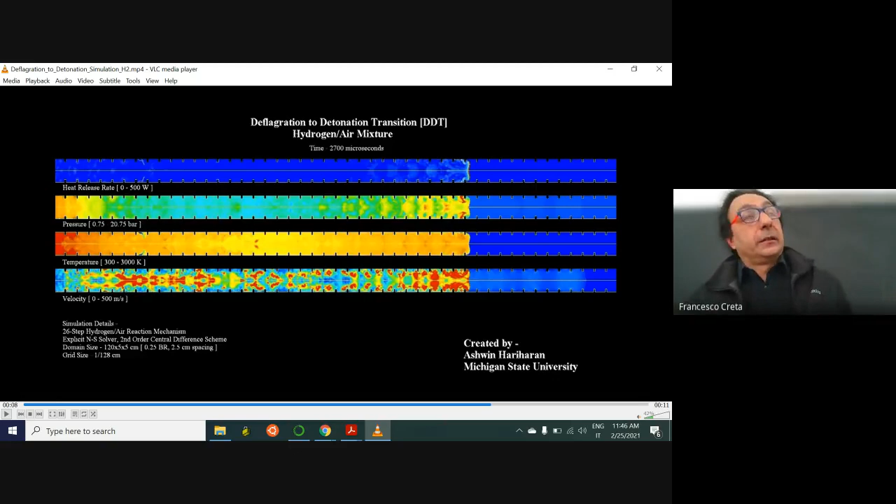This is a very instructive video because it also enlightens you on how fast disturbances travel in gaseous mixtures, okay? As you know, they all tend to travel through sort of acoustic perturbances at the speed of sound. But then you also have these structures here, which are combustion waves, which you're seeing for the first time probably, okay?

Well, okay, so next time I think we have a few slides left, but nothing special. Well, yeah, the candle, I'll show you another couple of movies. The candle is something that we should spend a few minutes on. And then once we finish these slides, I'll start the thermodynamics section, okay?